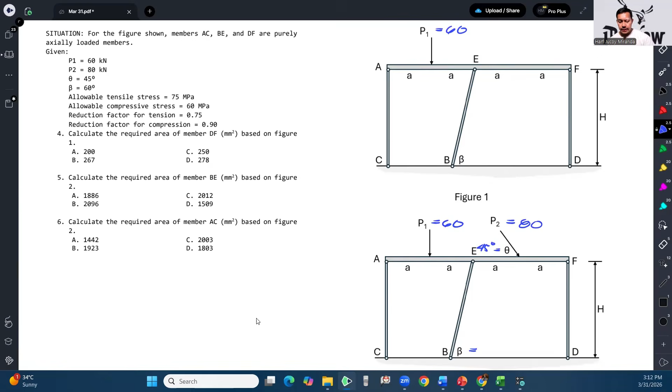We are given the allowable stresses, tensile and compressive, and also we are given the reduction factor for tension and reduction factor for compression. For number 4, calculate the required area of member DF.

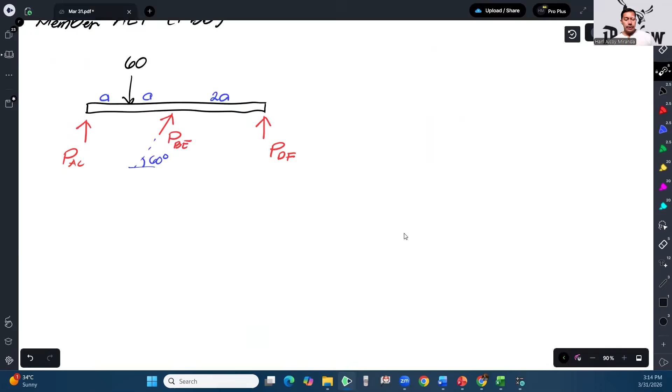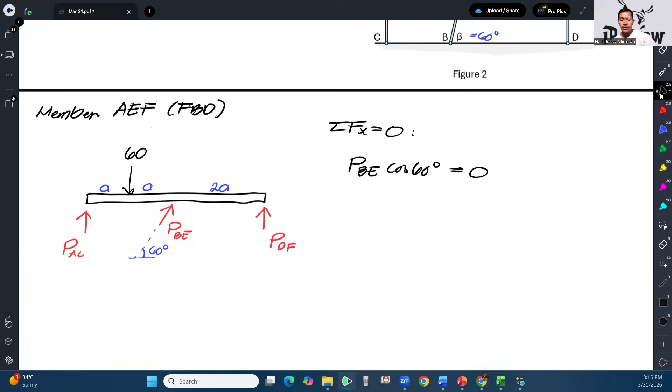Because of that, we can immediately get the value of PBE by taking summation of forces in X equal to 0. We notice immediately that the X component of PBE is PBE cosine 60. There's no other horizontal load, so it's 0. Therefore, the force BE is 0 for figure 1.

That means this is 0 now. Since it's already 0, to get this we can take moments here. Let's take summation of moment at A, assuming counterclockwise is positive. We have negative 60 times A, since it's clockwise. I won't include this one since it has no value.

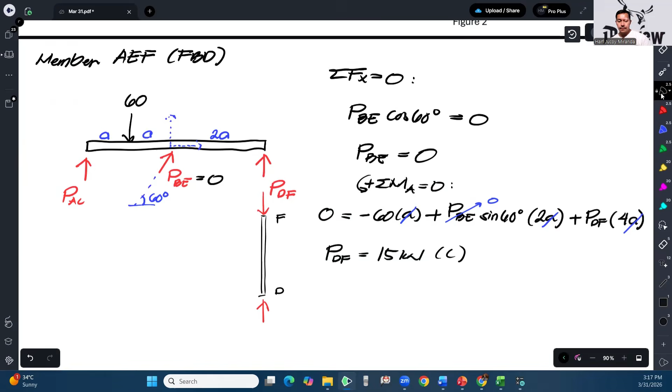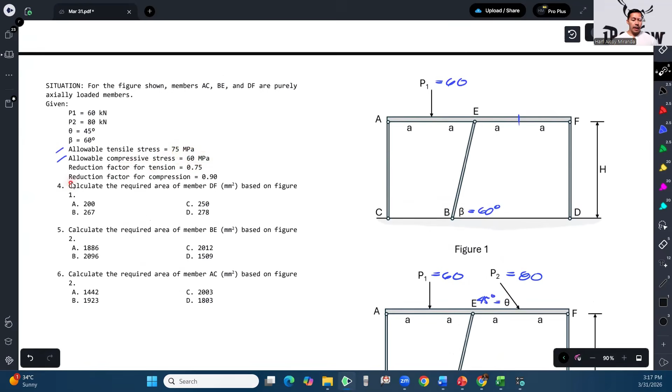So that means its nature is compression. Since it's compression now, we'll use the compressive stress of 60 megapascals. And don't forget to apply the reduction factor, which is given as 0.9. Therefore, the required area would be - the allowable axial stress in compression, which is force over area, should not exceed the allowable.

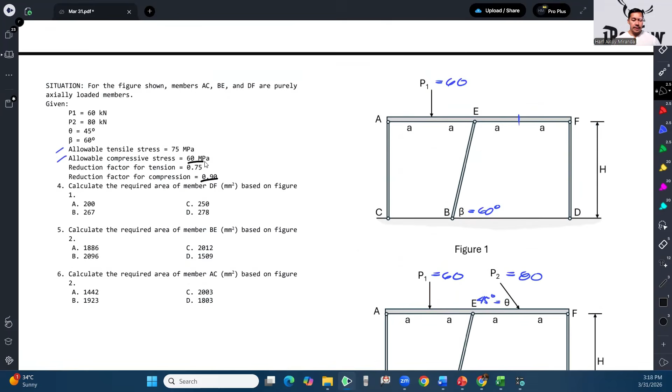So 15 - let's make it Newtons over area of DF. That gives us 0.9 times 60. So therefore we can solve for the required area for DF.

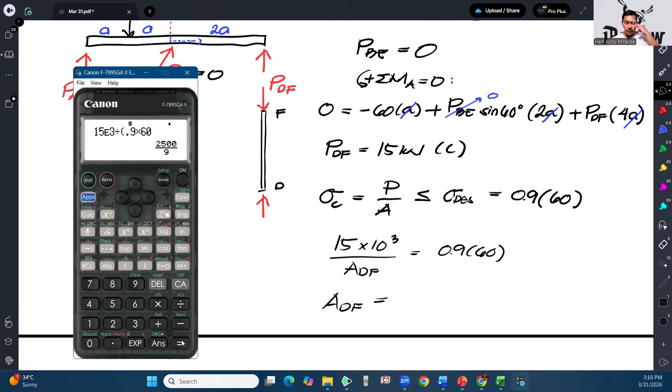So 15,000 divided by 0.9 times 60, that should give us 277.78 millimeters squared. So what's needed there,

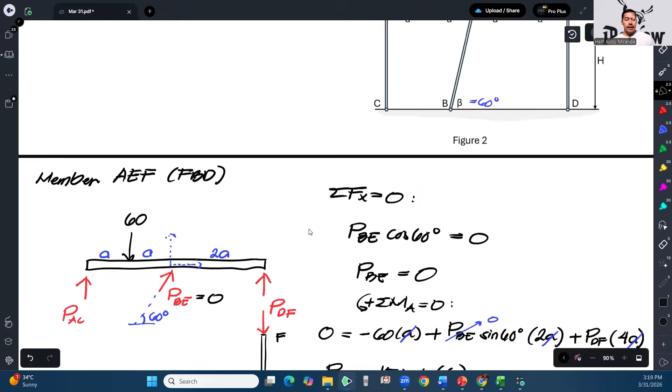Anything greater than that is okay, anything smaller is unsafe. So our answer for number 4 is letter D, 27.

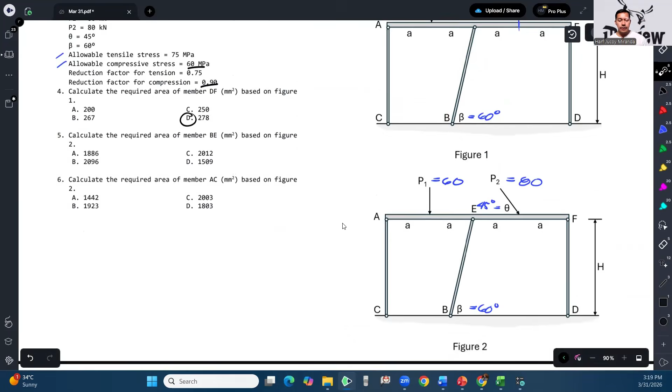Next, number 5: calculate the required area of member BE. For figure 2, based on figure, there's an additional load. If it's figure 1, you wouldn't need to design BE since it carries no load. So we go to figure 2, where member AEF applies again.

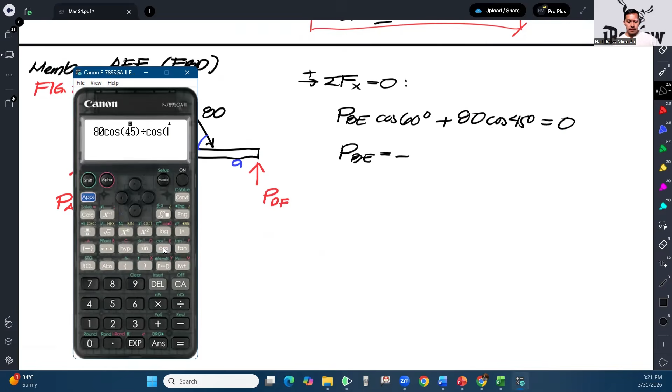That gives us 113.137, but negative. The negative sign here indicates that the direction should be reversed - wrong assumption.

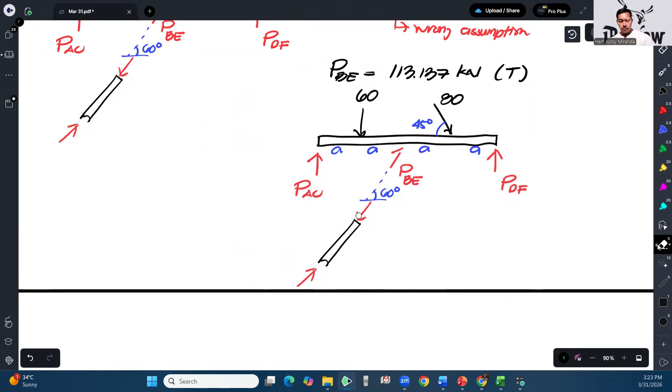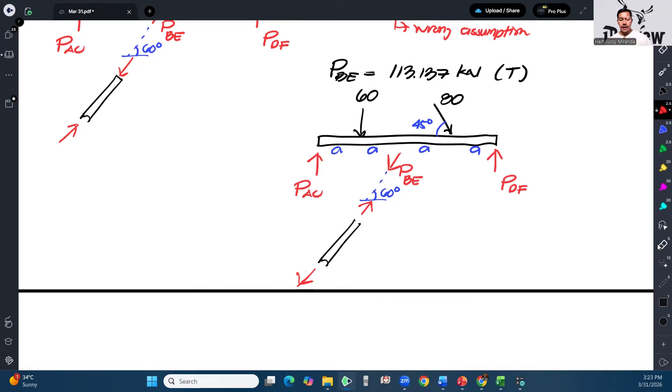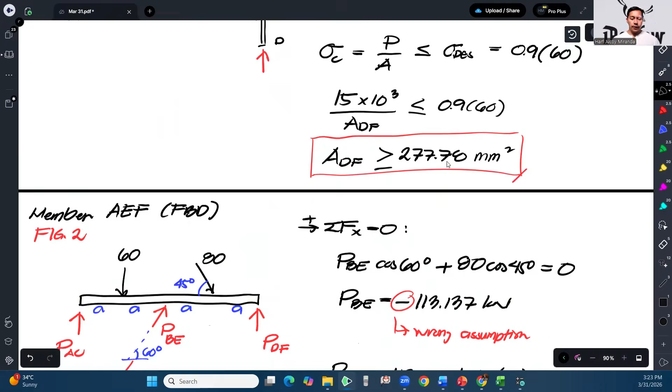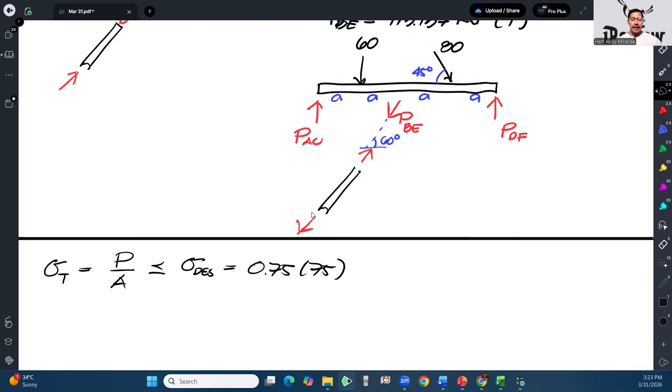Because it's tension, to compute its area we use this strength, with this reduction factor. So the tensile strength, which equals force over area, should not exceed the design strength, which equals 0.75 times 75. Our force for BE is 113.137.

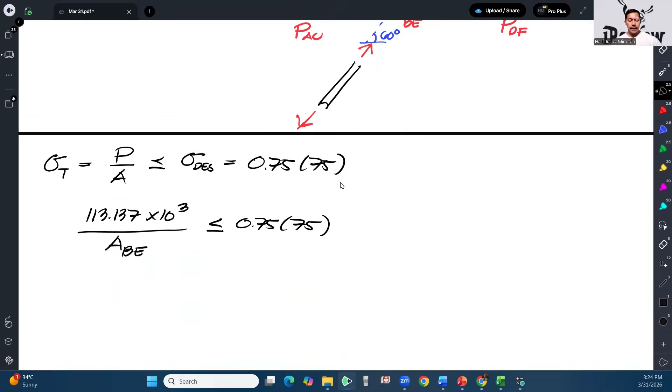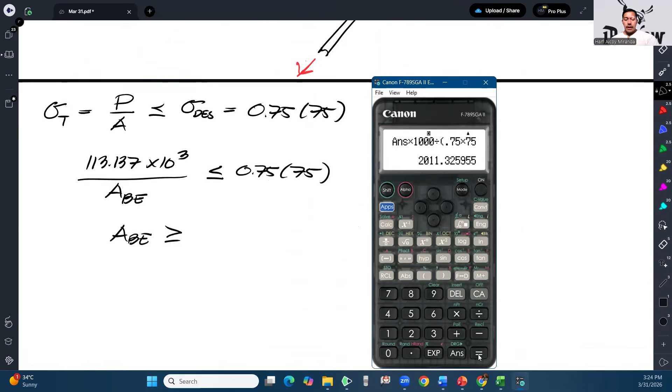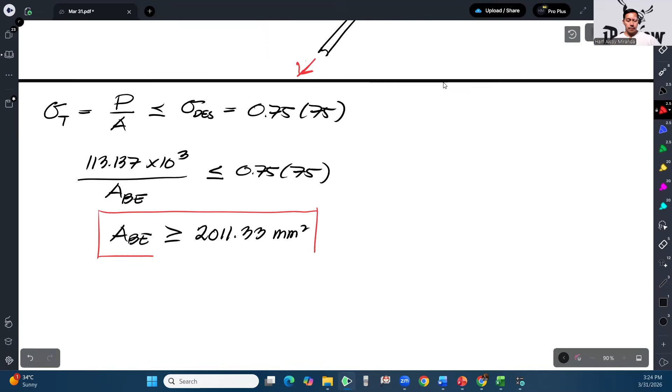We convert this to Newtons over the area of BE, and from there we can solve for the required area for BE, which is 2011.33. So our answer here must be letter C, 2012.

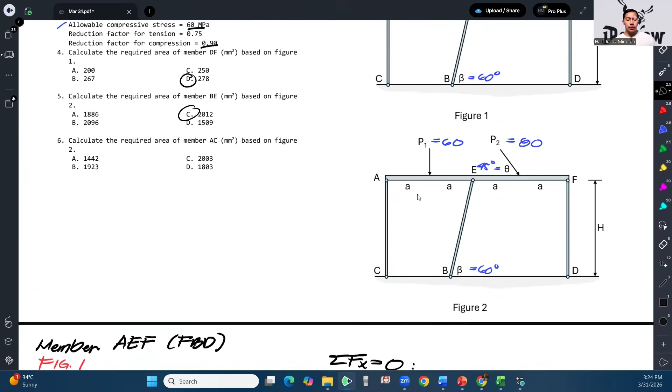Lastly, calculate the required area for member AC based on figure 2. To get the force there, we already have some values but not this one yet - but we can get it directly by taking moment about F. Let me copy this.

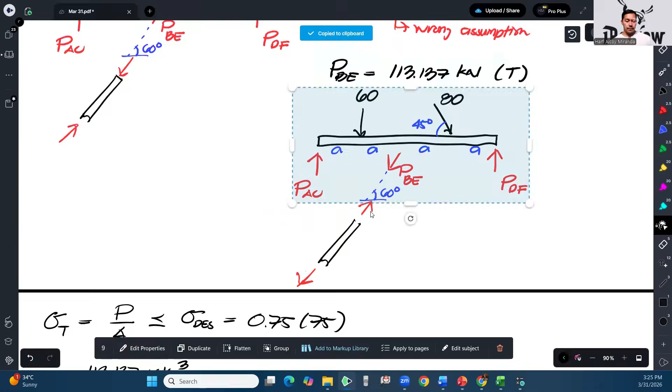For number 6, we know that this is 113.137. To solve for the force in member AC, I will take summation of moment at F - points A, E, F - assuming counterclockwise is positive.

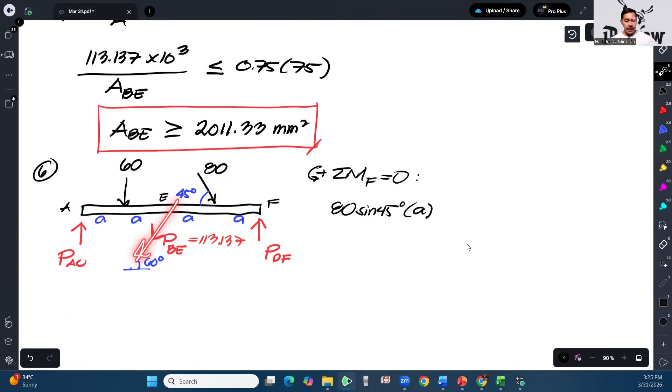I'll start with 80 sine 45, moment arm is A. Then next, since that one points downward, its rotation about F: 113.137 times sine of 60, with moment arm 2A.

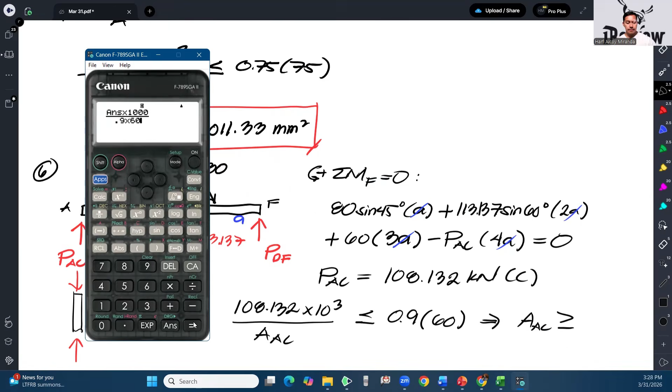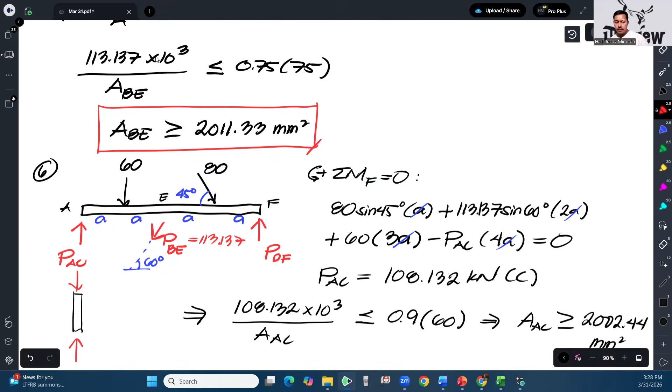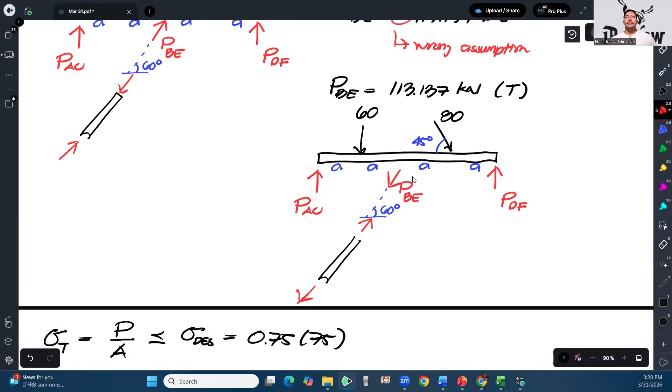That should be this value over 0.9 times 60, which equals 2002.44. That would be our answer - letter C.